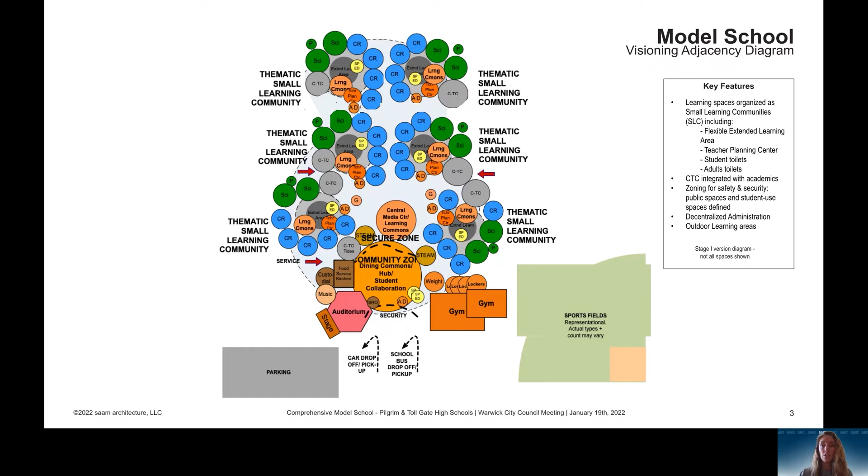As another reminder, this is the original concept diagram we first presented at our meeting with RIDE in August. This matrix outlines the comments made by RIDE at this meeting, which included coherent wayfinding, optimal building orientation, equity and identity, programmable circulation, and a superior school culture.

Through stage 2, we have been actively working to refine the original concept diagram into a project that further responds to RIDE's comments. In doing so, we presented this list of corresponding design considerations to RIDE in November, which outline the major goals of the project and include economy of structure, space, materials, and equitable model school approach, environmental design, including sustainability, clarity of circulation through planning, adaptability and flexibility with future change, and the building experience through visual permeability.

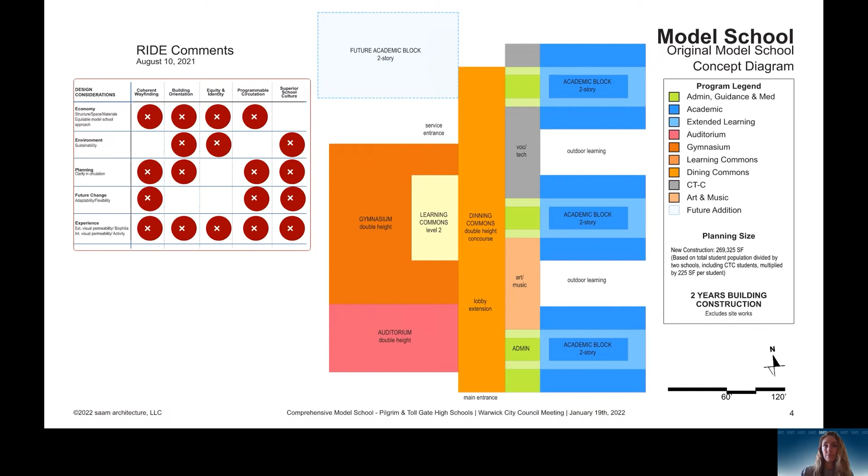The development of a model school has been adapted to both site locations. At Pilgrim, we've sited the new building to the east, which borders the adjacent commercial context. As a reference, you can see the demolished existing school building outlined dashed in red. The parking is set back from Pilgrim Parkway, establishing a generous landscape buffer between the residential neighborhood, as well as serving as a bioretention zone and acoustical barrier.

The vehicular traffic plan is designed for peak high volume traffic with maximum flexibility and adaptability for current, future, and occasional traffic patterns. Parallel bus and car drop-off lanes and 3 drop-off locations at the 3 building entrances reduce pedestrian travel distances and disembarkation time. The stadium and sports fields are linked to the gymnasium entrance to the west of the site, and all sports fields are oriented optimally relative to the sun path.

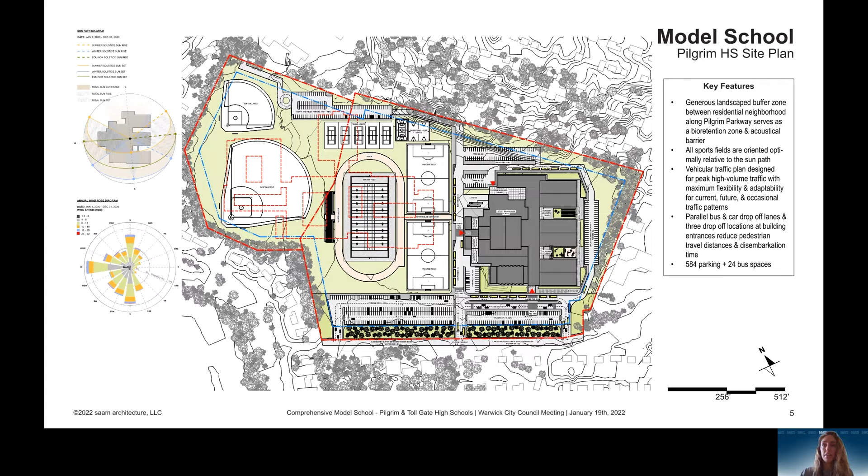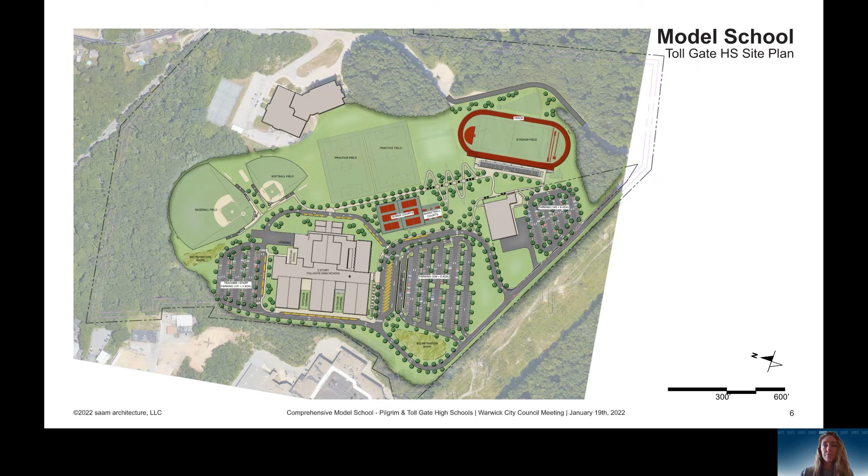We have developed a 2-story building, and here we are showing the overall first floor plan diagram. Pilgrim is being used to illustrate the model high school. Aside from mirroring the building, variations in the Tollgate plans mainly include the differing CTC programs.

The model school building is organized around this central spine we are calling the boulevard. Serving as circulation space as well as occupied by the learning and dining commons, we see the boulevard as an active public space with visual and physical connections to adjacent programs and the outdoors.

There are 3 small learning communities on the first floor to the east, and the gymnasium and the auditorium to the west. You'll see the colorful composition of the small learning communities that is reminiscent of the early visioning bubble diagram, bringing together different departments. The light blue extended learning areas are multi-purpose, collaborative learning spaces open to all departments, which encourage additional cross-curricular engagement between classrooms.

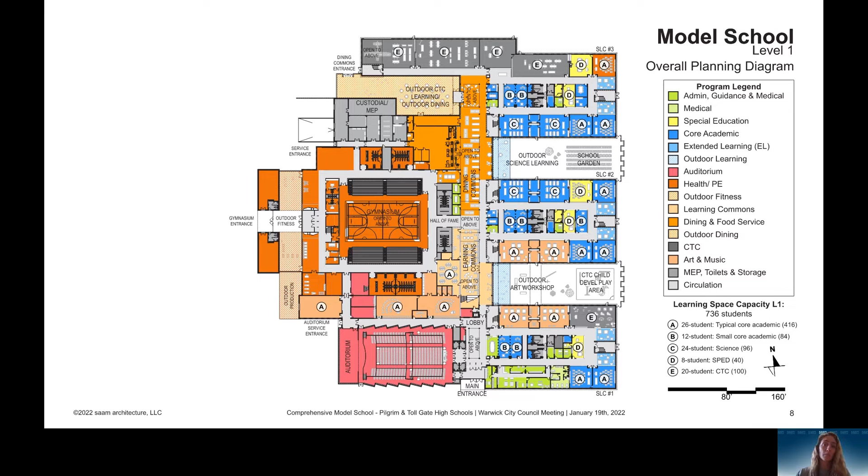There are 3 more small learning communities on the second floor, as well as additional programming at the gymnasium. The classrooms are oriented to the ideal north-south building orientation, maximizing the quality of light for learning. As a model school designed with adaptability and flexibility in mind, the academic wings can expand or contract as needed.

To accommodate the differing CTC offerings at the 2 high schools, these plan diagrams have been formed based on the RIDE dictated quantities and allowances, as well as user input. During planning and for coordination with the users, the learning space capacity information layered here identifies the type of learning space by its student capacity and tallies the maximum quantity of students that can be housed in all the learning spaces at one time.

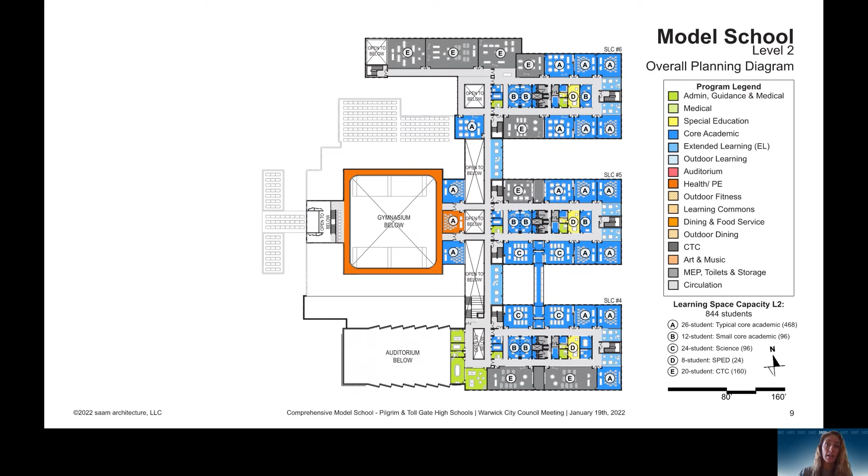These diagrams explore the extent to which the building is designed with visual permeability in mind. We have identified visual permeability as the clear sightlines from indoors to the outdoors, labeled external, as well as from one indoor space to another, labeled internal.

In addition to the windows along the perimeter, the green arrows show the direct or indirect visual connection of the indoors with the outdoors, allowing access to natural daylighting and views of the sky, clouds, and trees. This experience is called biophilia, which when exposed to supports the mental health, productivity, and social emotional learning of building occupants.

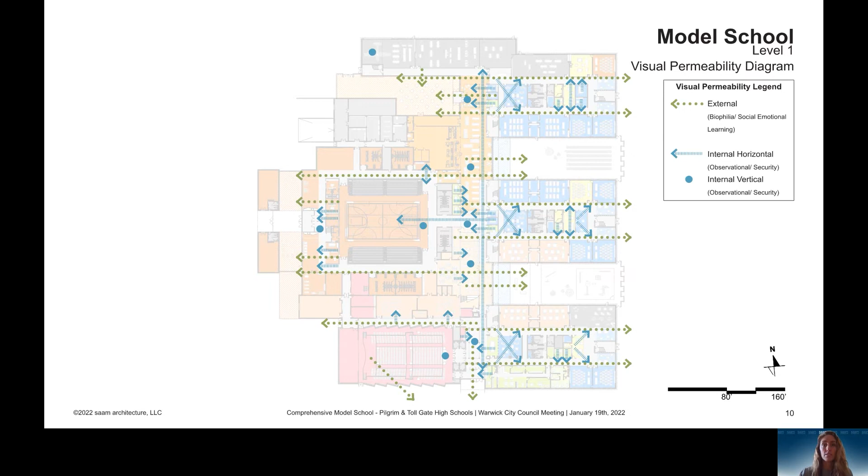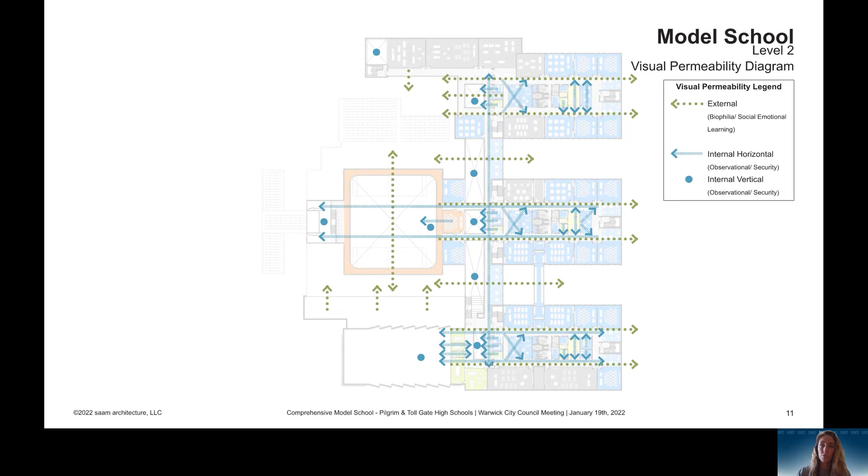The blue arrows demonstrate where the safety and security from staff and faculty occupied spaces overlooking student and public spaces is maximized. With straight sightlines, we are designing with clarity of wayfinding to enhance safety and to deter bullying. Additionally, the blue circles show where there are vertical visual connections from one floor to the other.

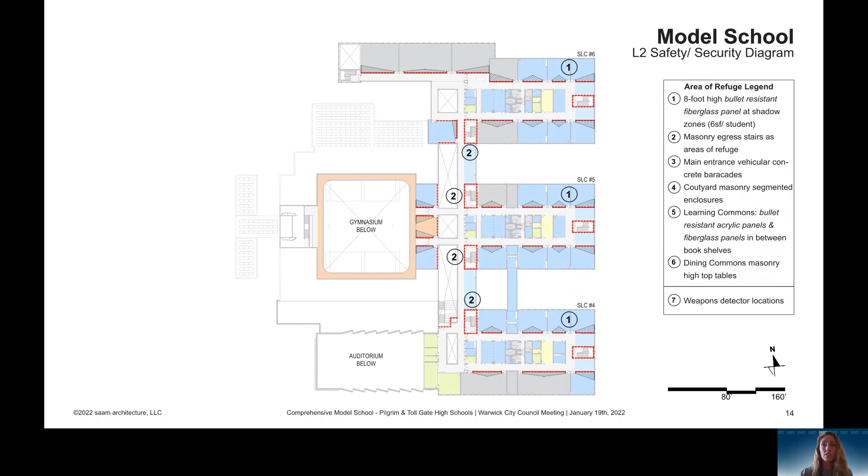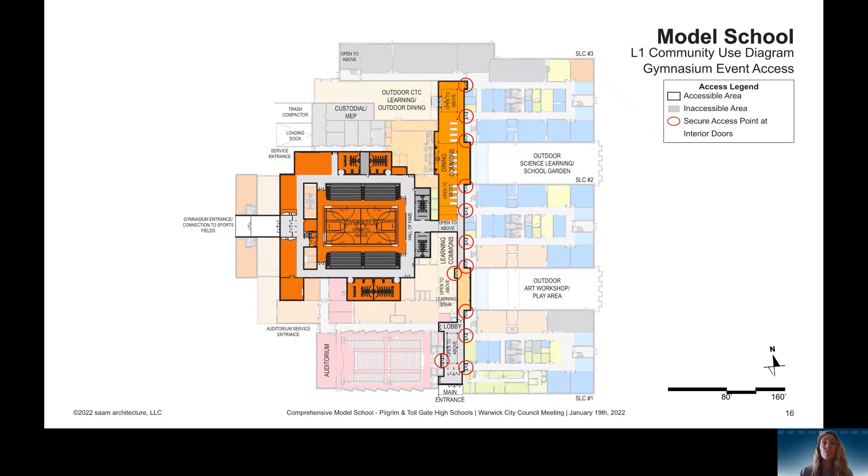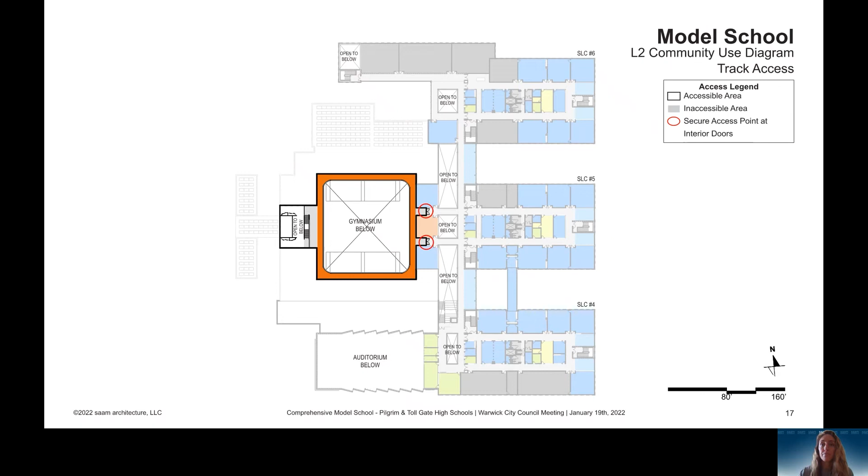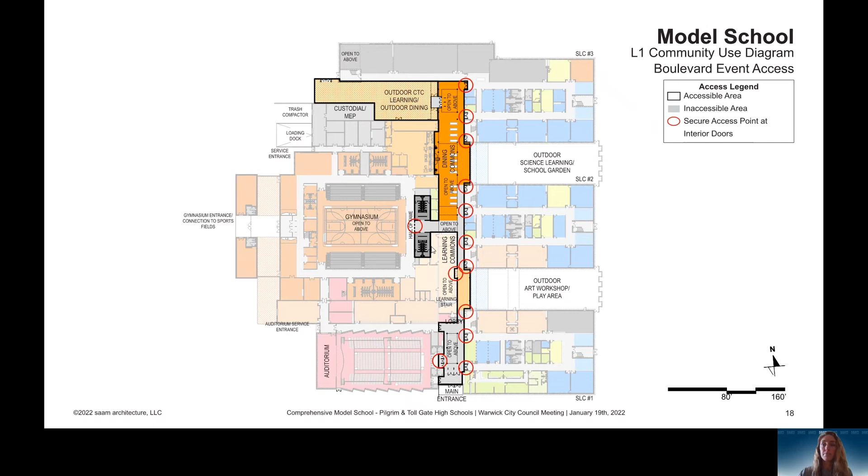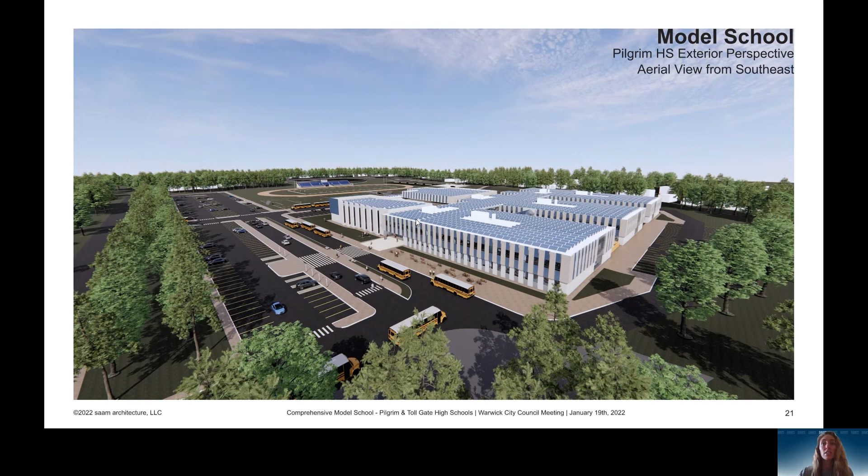This is an aerial view of the building from the southeast. The 3 volumes to the east are the academic wings, housing the 6 small learning communities. The gymnasium volume to the west relates to the sports fields beyond. The auditorium is also to the west, defining a prominent corner of the building. And connected to the main entrance, the boulevard runs through the middle, linking the programs on the east and the west.

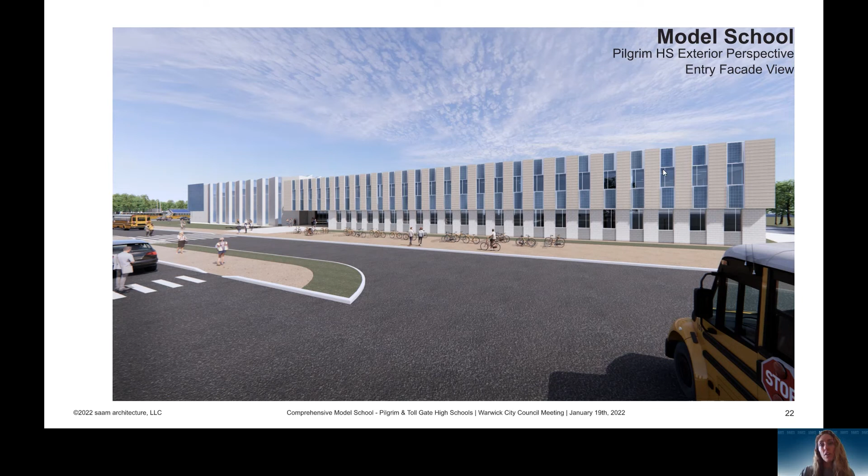We have focused on the economy of materials for efficiency and panelization of the facade. The first floor is composed of large format masonry as the base with punched windows. The second floor is composed of a rain screen system with segments of glass, photovoltaics, metal, and fiber cement panels.

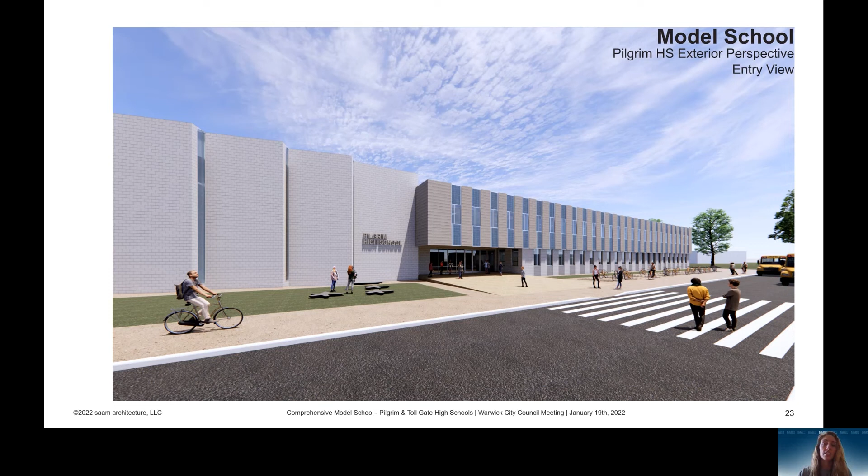The entry to the new school is clearly defined by the intersection of three basic massing elements: the first floor base, the second story facade, and the auditorium. The geometric composition of the three building masses creates a well-protected entrance, eliminating the need for costly architectural components such as a canopy. The composition of materials further defines the entrance, clearly signaling where to enter from all angles of approach.

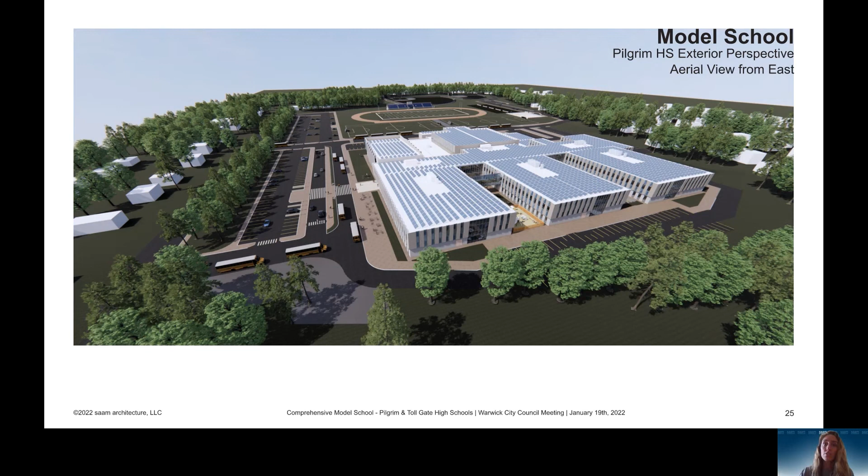We've coordinated the facade modules with the structural grid of the building for flexibility and adaptability. We regulated the floor-to-floor heights at 14 feet throughout so that a CTC classroom can be swapped with a general classroom space, for example, without interrupting the overall design or the facade.

PV panels have a 25 to 30-year warranty, and with the removal of 6 machine screws, can easily be repaired or replaced.

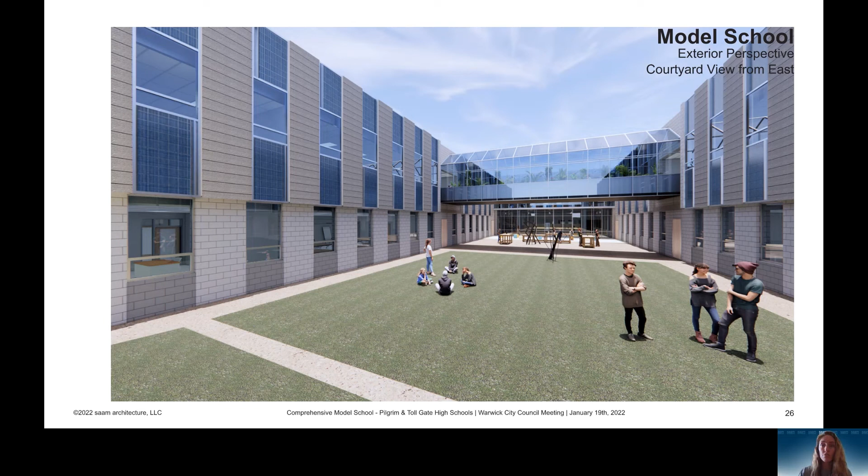While they are integrated within several small learning communities, we are exploring ways of connecting programs like art, CTC, science, and other core academics. In this exterior perspective, you can see the use of the courtyard space between small learning communities for outdoor cross-curricular engagement.

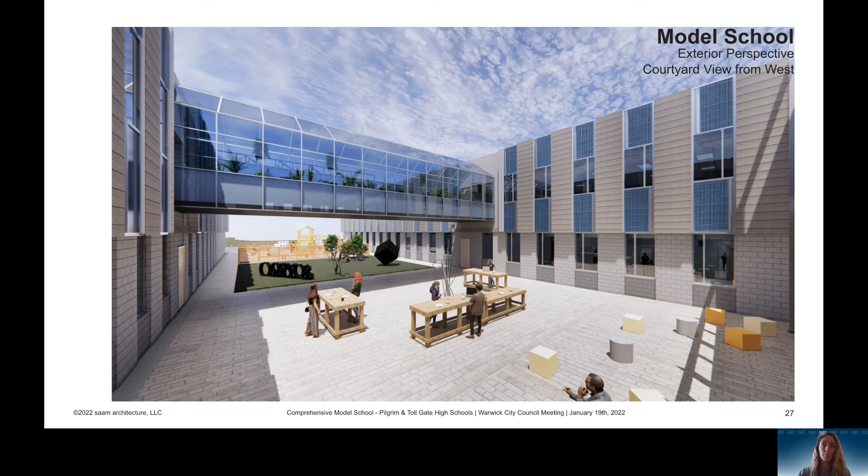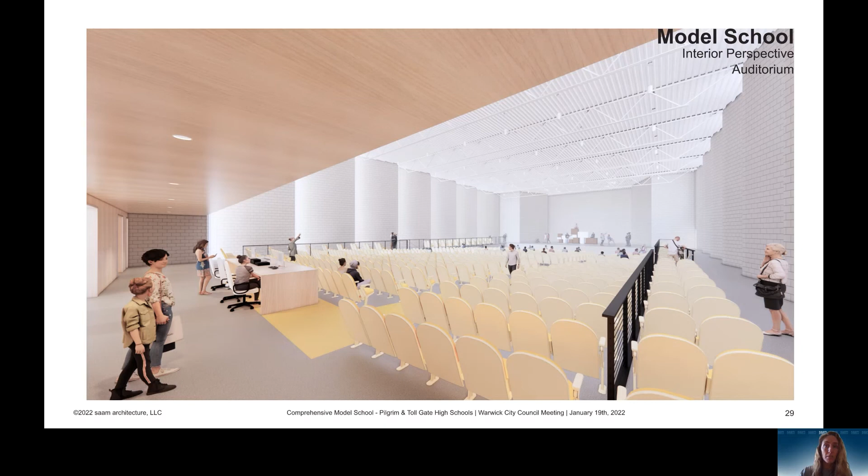The 720-seat auditorium provides space for both music and theater productions. It is simple, accessible, and also functions as a teaching space. It uses wood, glass, and masonry materials for their biophilic and acoustic properties.

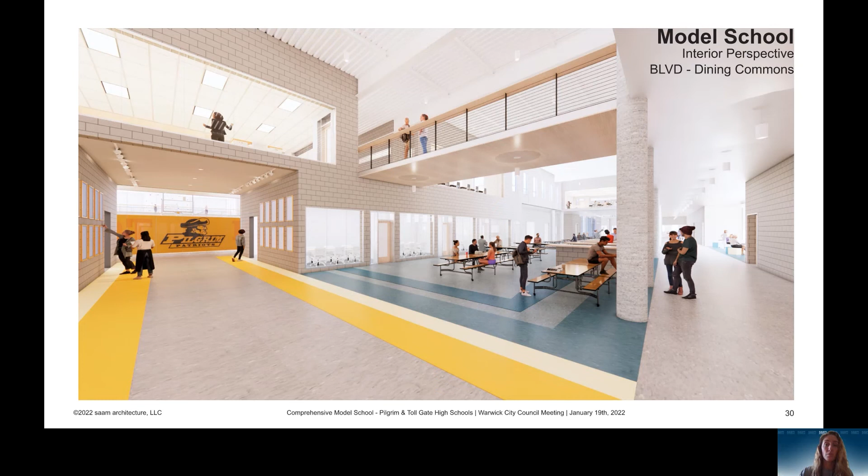Like the dining commons, the learning commons are located within the boulevard with visibility to and through it. We have zoned the learning commons so that it is accessible and visible, but also contained by way of glass partitions and book stacks. As designed, the library space is fully enclosed with secure entrances and exits. Each exit will have electronic monitoring devices to prevent books from being taken out without the proper procedures.

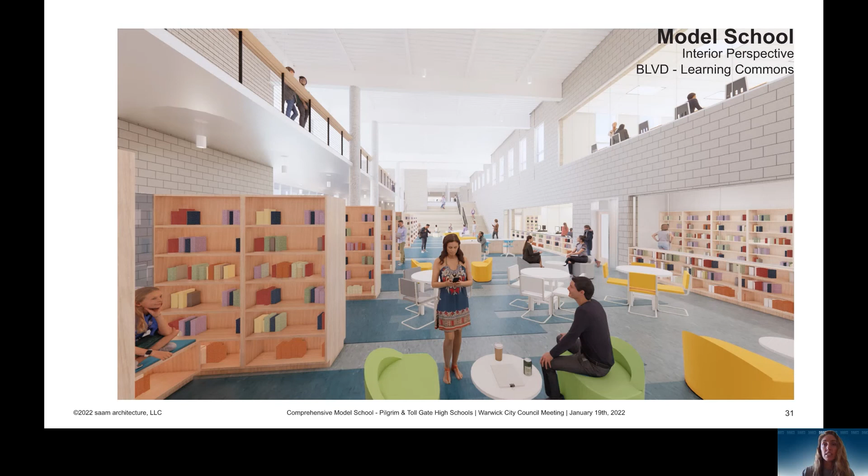There is a closed area of the library specifically intended for quiet study and small group teaching. A multi-purpose shared flex classroom located adjacent to the learning commons can be scheduled as a teaching space on an as-needed basis. We've designed library shelving to accommodate 15,000 books, and the circulation desk is centrally located as required.

The learning stair not only connects activities from the first to the second floor, but also serves as programmable teaching space with storage underneath. It is an extension of the more public side of the learning commons where students gather and move. This perspective view shows the visual permeability between the learning commons and the extended learning areas on both floors of the boulevard to the outdoor learning and the exterior.

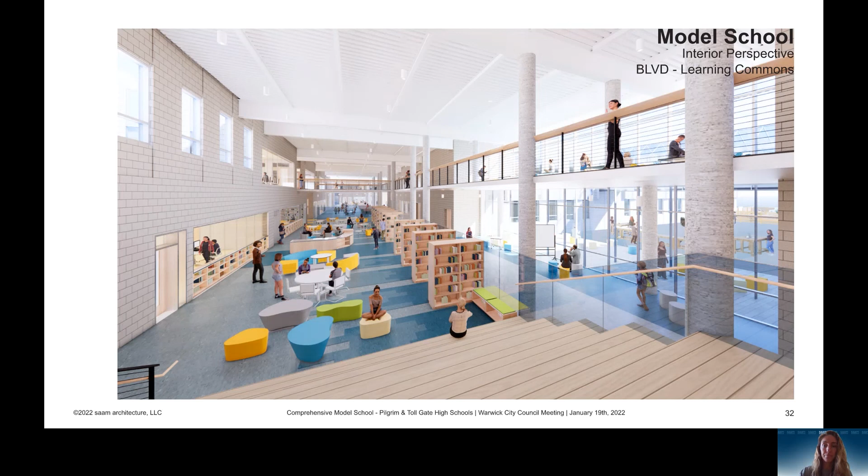This is a perspective view of the second floor boulevard overlooking the learning commons on the first floor. As an extension of the boulevard circulation, the clearly zoned extended learning area also has direct connections to the exterior.

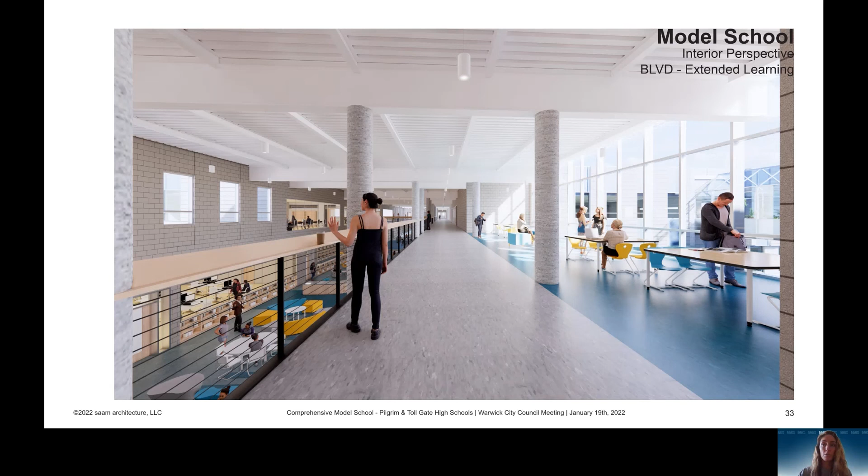Revealing the structure and exposing the makeup of its materials, we believe the building itself can serve as an object from which to learn.

This interior perspective shows the concepts of permeability with both exterior visibility to the outdoors and interior visibility through observational adjacencies of the level 2 programming.

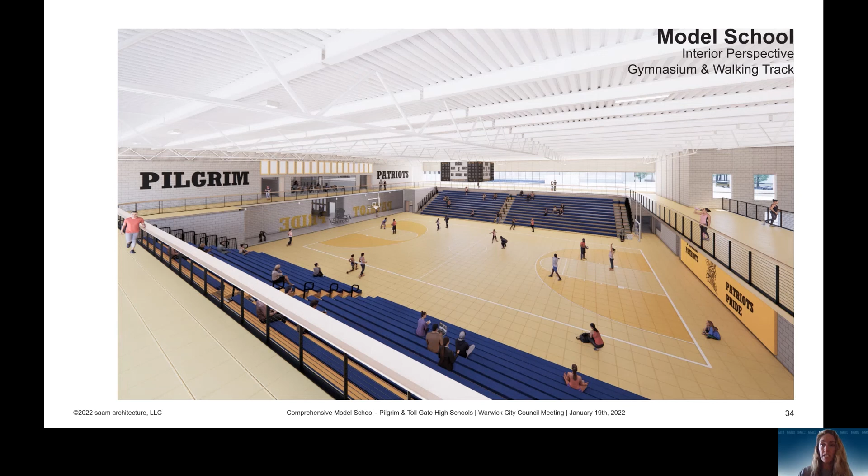2 sides of bleachers serving 1,316 seats flank the double height volume of the gymnasium. The gymnasium's double height volume not only allows for a walking track, but also a rock climbing wall extended vertically.

There is direct visual and physical access to the outdoor fitness and sports fields beyond this indoor fitness area. While activating this area, the glass also brings natural daylighting into some of the more internal gym program spaces.